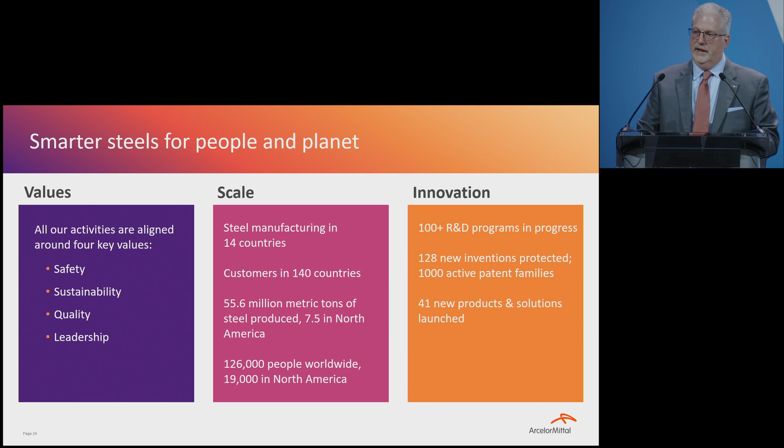And leadership. As a global leader in steel, we are a leader in our industry, moving it forward for the betterment of the planet by inspiring accountability, innovation, and collaboration. Leadership is built on a clear vision, challenging the status quo, and fostering a culture of continuous improvement and growth. And when you combine all of this with significant and sustained investment in innovation, R&D, new products, intellectual property, and of course, people, you begin to see how we turn ideas into industrial capability. That's the platform from which we are building a better tomorrow.

Okay, now let me shift gears and frame where we're going this morning, specific to North America. There are three things I want to cover. First, how we are moving from commitment to capability. Second, how we deliver that through our centers of excellence. And third, how it translates into innovation for our customers. This is not three separate discussions, but one integrated story, and that integration is increasingly defining success in our industry.

Okay, let's jump into from commitment to capability. Let me start with the environment in which we're all operating. The evolution of mobility is accelerating. The automotive landscape today is more complex than ever. We have tariffs and protectionism at levels not seen since before World War II. This is restructuring supply chains, and we have been directly impacted.

And as an aside, I'd like to thank our customers for how well they have worked with us to develop solutions and keep ArcelorMittal North America in play as a key part of their raw material procurement strategies. It's a testament to how well we've supported one another over the years, so thank you.

We are seeing slower BEV adoption while hybrids are accelerating and ICE remains more durable than ever. And at the same time, policy is shifting and not aligned globally, or as we're seeing with the current state of USMCA, even regionally. Simply put, tariffs, trade dynamics, and uncertainty around USMCA are reshaping supply chains. And on top of that, AI and automation are starting to impact both manufacturing and the broader economic and geopolitical ecosystem.

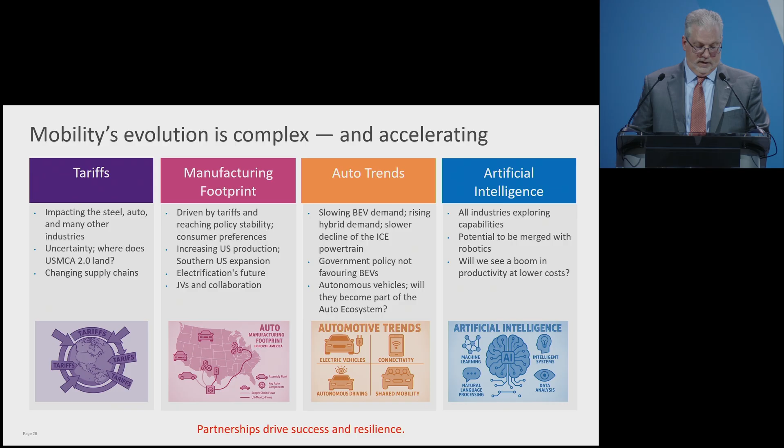So the key takeaway is this: there is no single pathway forward. Flexibility and adaptability is more important than ever. And that's why our strategy is built to support all propulsion technologies, ICE, hybrids, and BEVs, simultaneously, and why we

will adapt our existing footprint to better support automotive in the new North American and world order. With the world around us constantly changing, there's one thing I absolutely want to make clear, and that's what's not changing: ArcelorMittal's commitment to North America and the automotive industry.

We operate 47 facilities across the US, Canada, and Mexico, and we are constantly looking for ways to improve and expand our current footprint, be it through organic growth, greater self-sufficiency, or M&A. And importantly, we are present across the full value chain, from raw materials to advanced engineering solutions. We serve every major OEM and Tier 1 community, delivering over 3 million automotive tons annually through our automotive centers,

ArcelorMittal Dofasco and ArcelorMittal Calvert. These facilities are supported upstream and downstream by the ArcelorMittal network, but make no mistake, they are the heartbeat of our North American automotive portfolio and franchise.

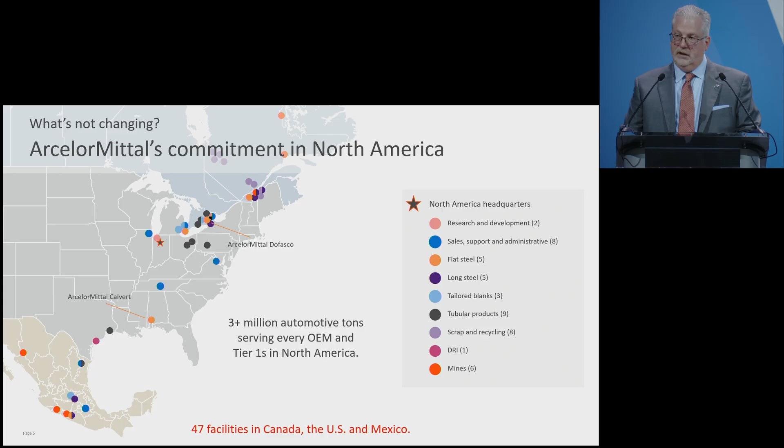But beyond raw materials, assets, and products are our people-powered solutions, which, via collaboration with our customers, are ever more embedded in our customers' business, in supply chains, in their vehicle programs, and increasingly in their engineering decisions. And that's critical to our mutual success.

But commitment and scale is not enough. What matters is how you convert them into something that creates value. And for us, that starts with what we call our centers of excellence.

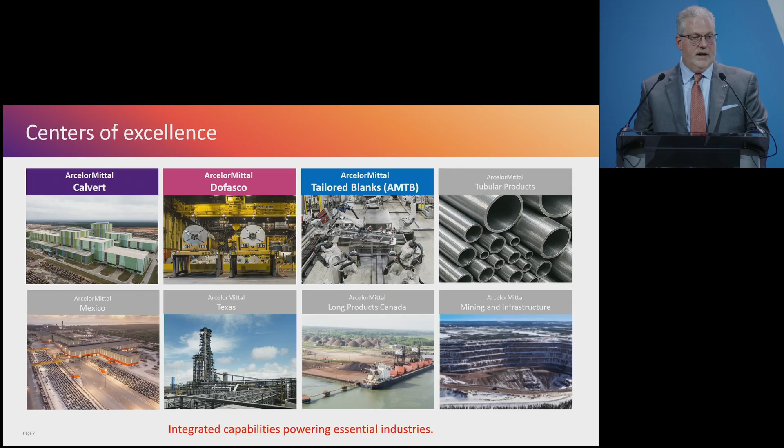Our automotive centers of excellence, Calvert, Dofasco, and AMTB, are not isolated assets. They are part of an integrated North American system comprised of mining and raw materials, steel making, long and flat carbon production, to downstream tailored blanks and tubes. From Calvert to Dofasco to tailored blanks and tubular, we bring together complementary capabilities, and this allows us to be a full service provider that can align more closely with our customers' needs.

Now let me bring to life one of our most important anchors in North America, ArcelorMittal Calvert, located just north of Mobile, Alabama, servicing the US and Mexico. Calvert is a clear example of what happens when safety and operational discipline are non-negotiable. When those two foundations are in place, everything follows: quality, reliability, and performance.

This is a state-of-the-art finishing complex with a powerful hot mill, integrated pickle tandem cold mill, 3 coating lines, and Calvert recently added steelmaking to its footprint. Calvert's EAF-1 steelmaking complex is now up and running with automotive qualifications progressing well and moving toward regular mass production supply. From a steelmaking perspective, this is a highly advanced operation.

We're combining engineered raw materials, primarily DRI from ArcelorMittal, Texas, into an electric arc furnace with RH degassing and a single strand continuous caster. We have the technology, process controls, and input flexibility required to make our full automotive portfolio. From exposed automotive grades and advanced high-strength steels, Gen 3 and Usibor solutions, to electrical steels supporting localization, we are delivering the full spectrum of next-generation vehicle requirements.

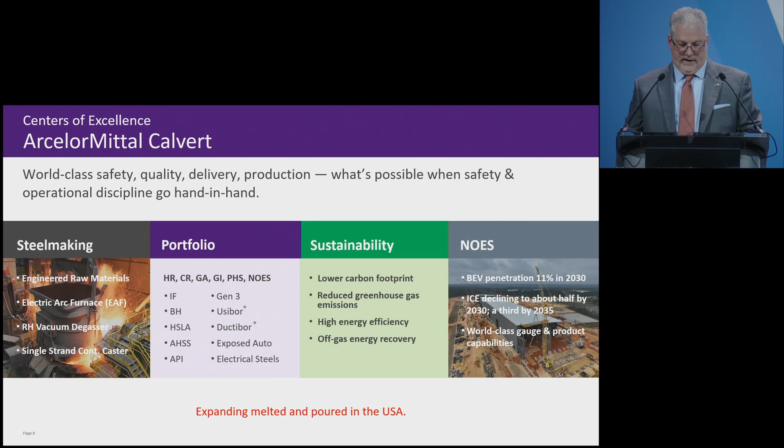Now let's turn to another cornerstone of our North American footprint, and that's ArcelorMittal Dofasco. Dofasco is more than a facility, it's a legacy of excellence in steelmaking, built on a deep-rooted safety culture and a consistent commitment to doing things the right way. This is a site where values are not statements, they are embedded in daily execution.

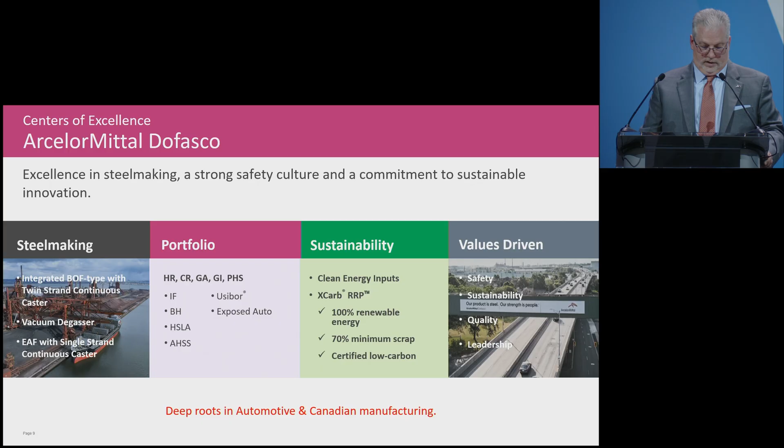Finally, this site represents something broader: our deep roots in Canadian manufacturing and automotive. It's a trusted partner to the OEMs and a critical link in what has been a highly integrated North American supply chain, and what now is a critical local piece to support automotive in Canada with capabilities to compete as far away as Mexico. Dofasco is not just a center of excellence, it's a benchmark of what sustainable, values-driven steelmaking looks like.

Let me shift now from steelmaking and value-added production to where those capabilities translate directly into customer value, and that's ArcelorMittal Tailored Blanks. This is where we move beyond supplying steel to engineering solutions in the vehicle itself. One of the best examples is door rings, a product for which we have built real specialization and scale.

You can see the trajectory here from just 1 million units a few years ago to more than 10 million units per year by 2030, with over 22 million produced today. That growth reflects not only demand, but the role ArcelorMittal Automotive and Tailored Blanks have and now play in collaborative vehicle design. Because the value here is clear: combining multiple grades, thicknesses, and properties into a single optimized component provides lighter structures, improved crash performance, and lower system costs, all at the same time.

How's this accomplished? One word: co-engineering. We are working side by side with OEMs across crash analysis, forming simulation, material optimization, and even CO2 footprint analysis. From CAD support through to additive manufacturing, we help shape the part before it's ever produced. That changes the conversation. We're no longer just a material supplier, we are a design and performance partner.

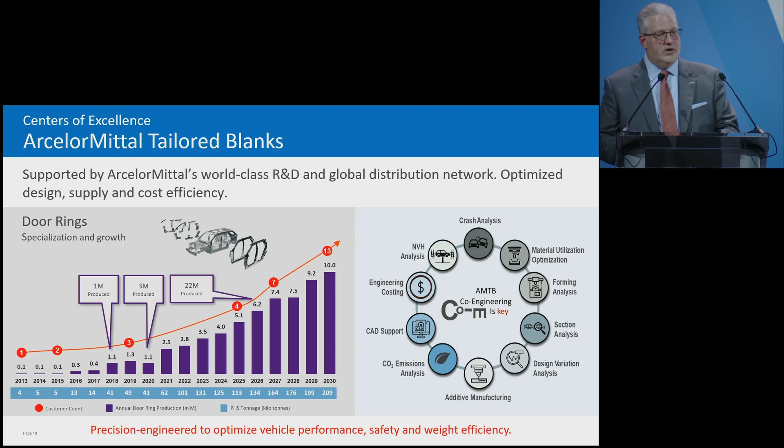And as vehicles evolve, with lightweighting, electrification, and cost pressure all increasing, that partnership becomes ever more critical. ArcelorMittal Automotive and Tailored Blanks represent a bridge between our steelmaking excellence and real-world vehicle performance, precision engineered to deliver safety, efficiency, and value. We're engineering solutions, not just supplying steel, and that's where capability becomes real.

As I've noted, capability is not enough. The real question is, how do you translate that into products and solutions, into innovation that matters? And that's what I'm going to focus on next.

On the left-hand side, you'll see the familiar strength versus elongation curve, commonly called the banana curve. ArcelorMittal produces almost all of these steels in one form or another. But for this slide, I want to talk about two specific types of cold-forming steels.

First, we've made considerable progress with our third-generation advanced high-strength steel, like the Fortiform series, providing an exceptional balance of weldable strength and formability. This is accomplished by optimizing austenite via our advanced Q&P processing technology, leading to weldable steels that maximize and balance strength and ductility with good hole expansion and high bake hardenability. All this enables a 10 to 15% weight reduction without sacrificing formability and performance.

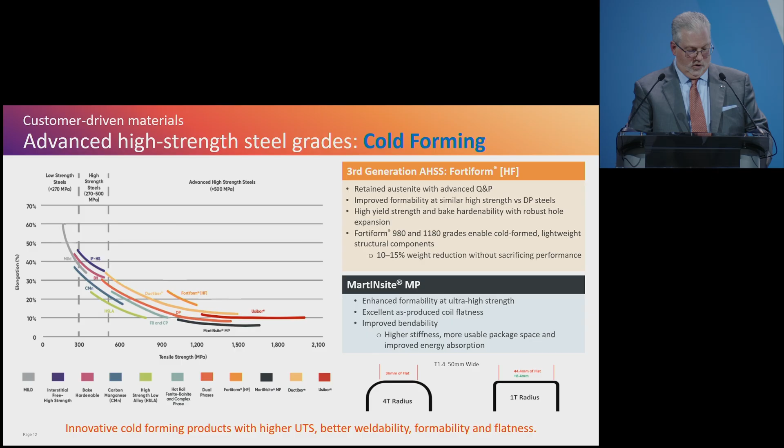Next, new products like MartINsite MP create more design flexibility. This product family will deliver high strength, enhanced formability from coils with superior flatness, which is critical for manufacturability. MartINsite MP will offer improved bendability, driving higher stiffness, a more usable package space, and improved energy absorption. So the result is simple: lighter structures, better performance, more design freedom, and that's what the OEMs are looking for.

In hot stamping, we are pushing performance even further. First with Usibor 1500, the most widely used press hardening steel in North America, and then to Usibor 2000 for even greater strength and weight reduction, to the next generation Ductibor series, moving from 500 to 1000 MPa and ultimately 1500 strength levels. Ductibor 1500 will give us the strength of Usibor 1500 and the crash ductility of Ductibor 1000, pushing metallurgy to its limit, all in the name of better solutions and vehicle structures for our customers.

We're also helping to boost productivity with innovations like ThermoBoost. All this helps maximize strength and ductility to enable complex shapes and structures needed to optimize the body in white. That translates into stronger, safer structures, more efficient manufacturing, and ultimately world-class vehicles. For OEMs, it's the ability to meet safety, lightweighting, and ever-critical cost targets without compromise. And that's becoming increasingly critical as vehicle architecture adapts to an ever-changing world of mobility.

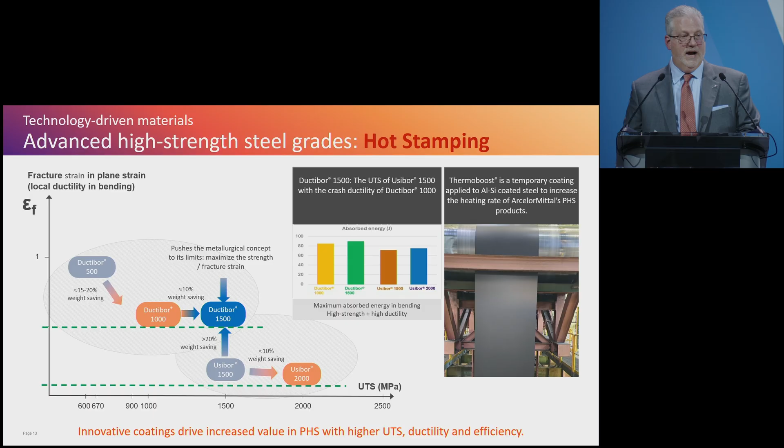Innovation today is not done alone. It requires collaboration, what we like to call co-engineering, working with OEMs and Tier 1s to navigate the complex trade-offs of safety, cost, weight, fuel economy, range, and overall vehicle performance. At ArcelorMittal, we have long championed co-engineering and strong technical support, helping our customers leverage innovations across the steel industry.

Starting with our industry-leading S-in-Motion solutions, we have successfully worked with customers to bring innovations into vehicles. A notable example is the Acura MDX door ring about a decade ago, sparking the many programs and door rings that followed—22 million by the end of this year, with projections of making 10 million a year by 2030.

We continue to apply that model across every new product family, from third generation cold stamped to second generation PHS, Usibor 2000 and Ductibor 1000, to next generation Ductibor 1500. More recently, we have contributed to the needs of electrified vehicles with products and solutions for critical parts like battery pack structures, and applications like rockers, body side structures, and more. So the shift is this: we're not just supplying material, we're helping provide the products and steel solutions needed to design vehicles for today and tomorrow.

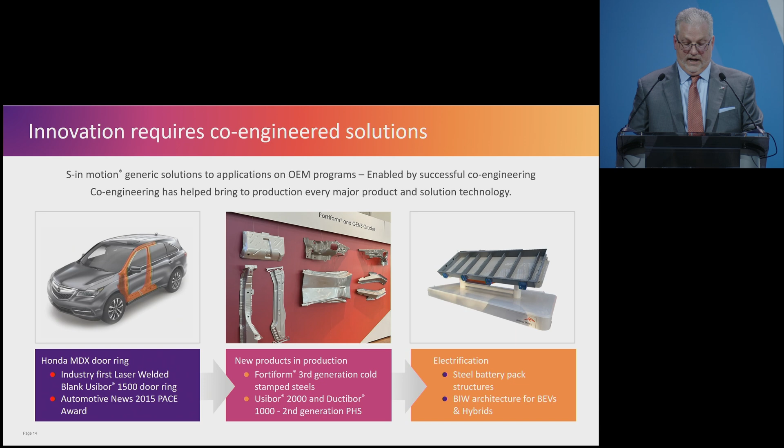Multi-part integration, or MPI, is a fitting example of that. It's about stepping back and rethinking the whole automotive design and production system, asking: how do we reduce part count? How do we lower cost? How do we simplify the production process? How do we improve performance? Doing all of these things at the same time.

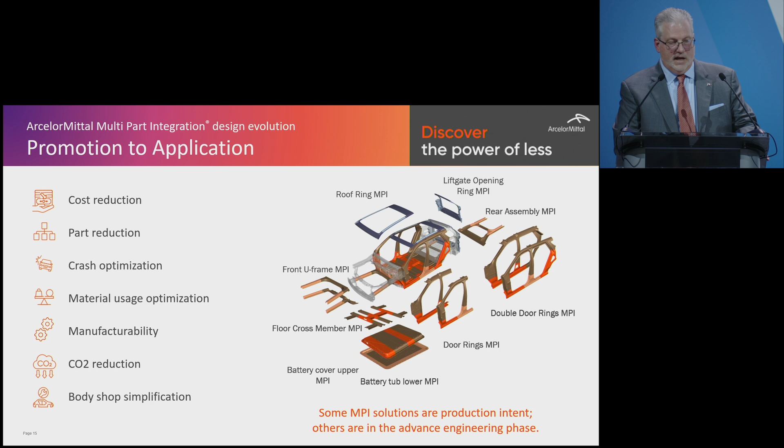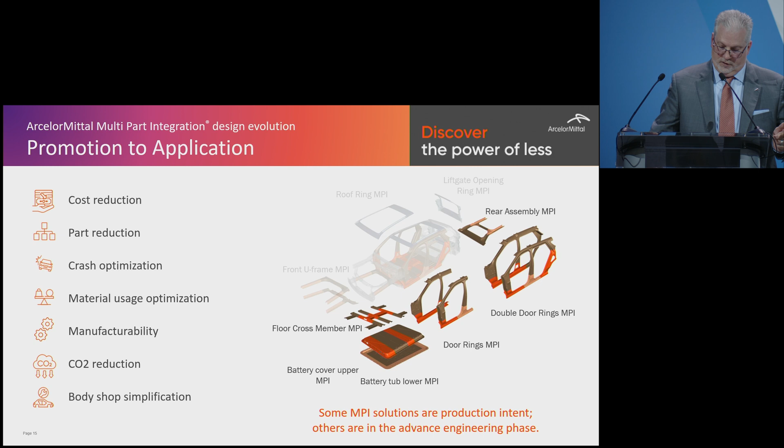Since we introduced MPI at this very event two years ago, what we're seeing now is real progress from concept to production intent. We have undertaken several advanced engineering projects, some of which have resulted in specific designs that we expect to see on the road in the next year or so. These solutions are moving steel and automotive forward toward real vehicle applications with clear benefits: lower costs, fewer parts, simplified manufacturing, all geared toward more sustainable and better performing vehicles.

This is the power of steel. This is the power of ArcelorMittal. This is the power of less.

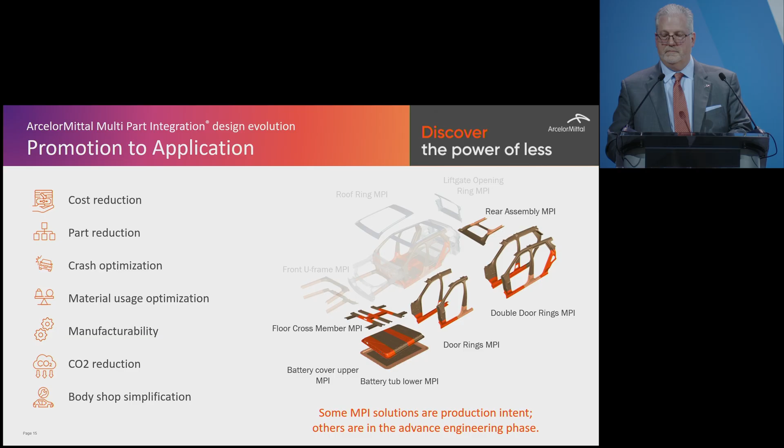So let me close with where we started: from commitment to capability, shaping the future of automotive in North America. We're committed to automotive, globally and here in North America. The heart of our automotive franchise is built on ArcelorMittal Calvert, Dofasco, and Tailored Blanks, assets we continue to invest in. We are investing in next generation steels and steel solutions and the assets needed to produce and provide them so that we continue to have leading capabilities.

That includes advanced cold forming and hot stamping technologies and electrical steels, as well as realizing a greater degree of self-sufficiency and supply chain resiliency. In short, we're advancing ultra-high strength materials, building capabilities to support electrification, and adding and enhancing assets to enable these things. Critically, we are positioning ourselves to lead, regardless of how the market evolves. So you see, we are steadily moving from commitment to capability, and that helps shape automotive in North America.

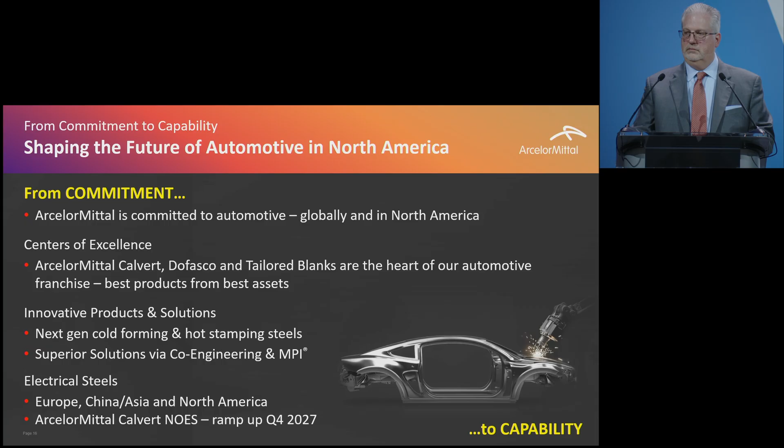As for the question we all ask ourselves, what does the future hold? Take a look at this. When you ask that question, you'll find the answer starts with a lot more questions. Like, how do you power growth? Or how do you make progress equitable, safer? How can you build without taking away? By 2050, there will be 2 billion more people on Earth—that's 2 billion more needs for mobility, for infrastructure, for energy, for home, for a future that can sustain it all. Now the question is, how do we build that?

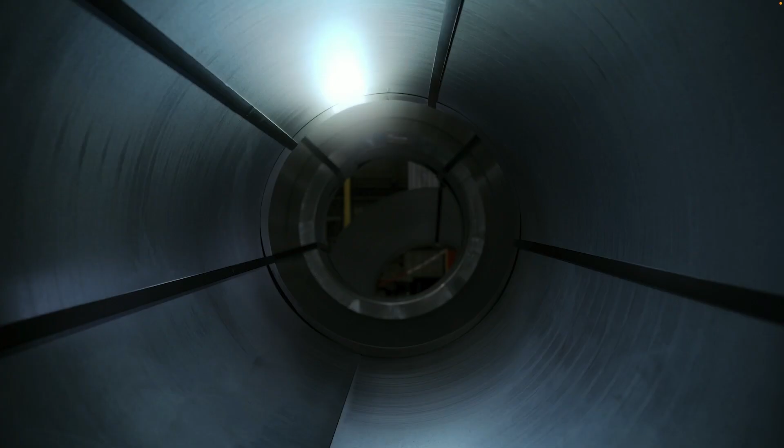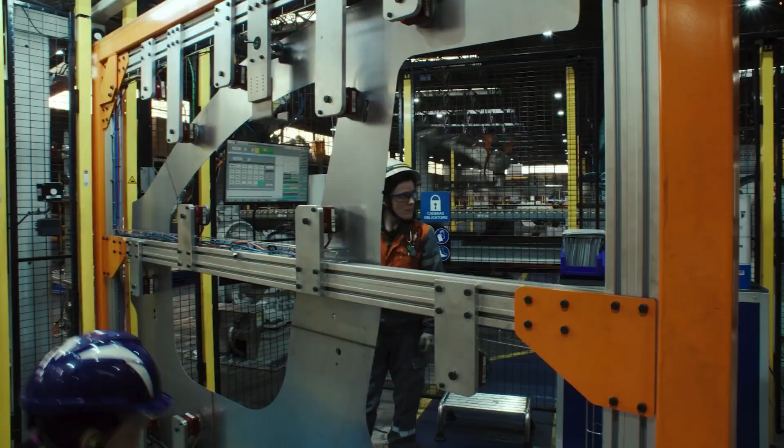That answer starts with the materials we choose—materials that are smarter, stronger, lighter, that can adapt, evolve, and endure. So then naturally, you start looking at steel. You get why bridges look like that, which then leads you to structure and design of car doors. Then you learn about manufacturing and what the production line has to do with progress, or clean energy, or the evolution of the electric vehicle. Now you see that steel has been the backbone of all this for over a century—thousands of advanced grades supporting a low-carbon, circular economy.

But the future isn't shaped from materials alone. And that's where you'll find us, ArcelorMittal—our engineers, scientists, makers, developers, visionaries. People. 125,000 of them across the planet. They design modular car parts, develop sustainable buildings, create our renewable projects, and power our AI-driven operations.

Solutions for the ever-changing world. A smarter world with smarter steels. Then once you have all that, you remember what brought you here in the first place: what does the future hold? Well, maybe the better question is, who holds the future together?